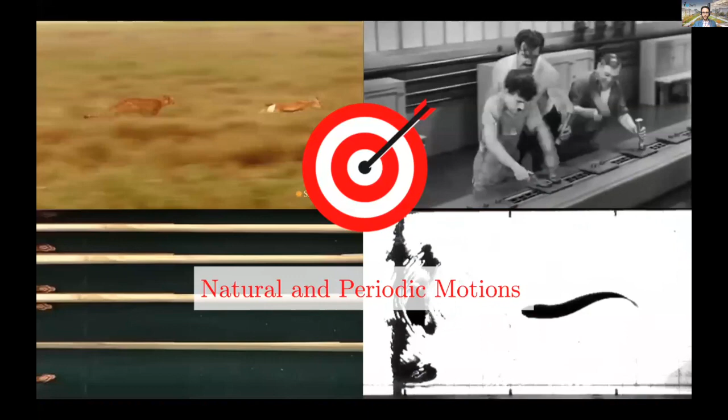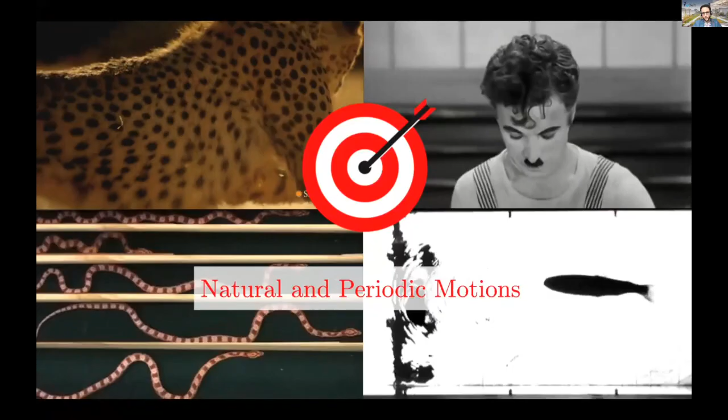The work I'm going to present, like many works we've seen at this conference, is inspired by nature, by the amazement we feel every time we look at the animal kingdom, and more specifically by the capability of humans and other animals to perform periodic motions in a very efficient and effective way.

As we know from decades of studies in biomechanics, these capabilities are strongly mediated by the presence of elastic elements together with inertia elements in the body of animals, like tendons and muscles.

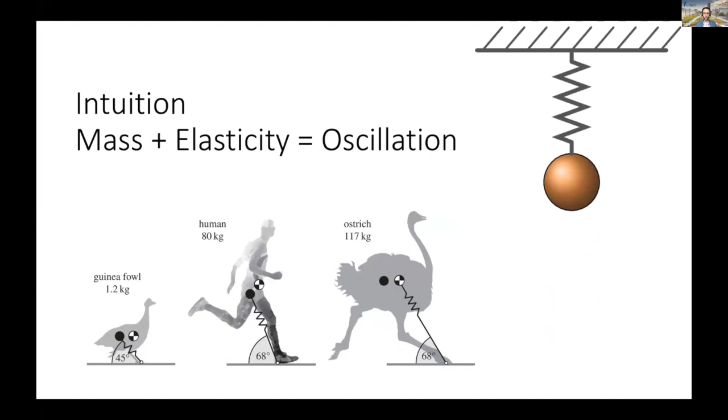This is clear intuitively if you think about linear modal analysis. For example, if you just put a mass together with a spring, what you get is open loop oscillations.

This was one of the big reasons why people started putting elastic and soft elements into the body of a robotic system, leading to what some nowadays call soft robotics. You can see a bunch of nice examples here.

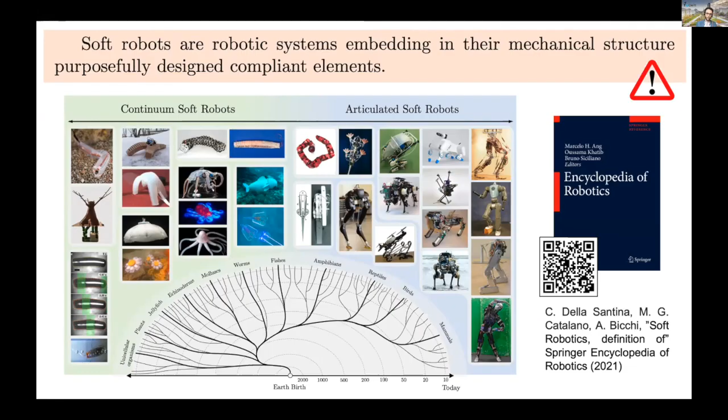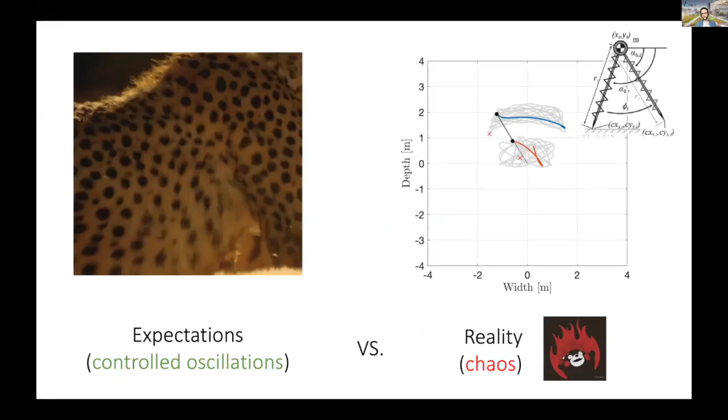However, while we have all these very cool structures, what happens if in simulation you try to take a very simple mechanical system with some elasticity, like the one on the right, is that the oscillatory behavior you find if you just initialize the system in some initial condition and leave it be is quite different from expectation—the controlled oscillations we observe in animals—and is instead more close to chaotic behavior.

The goal of this research is to look for the needle in the haystack—looking for regularity, open loop regularity, within this haystack of chaotic behavior that we find in mechanical systems.

We do that with a framework we call controlling eigenmanifolds, and let me try to convey the basic ideas of this framework in a few minutes.

What we do is divide the design into two steps. The first is about analyzing or understanding what the robot can do well—in terms of its mechanics, what it can do in terms of oscillatory behavior.

We do that by extending the very linear modal theory I used at the beginning of the talk as a kind of intuition. In a linear system, you have all these eigenspaces, one for each degree of freedom. An eigenspace can be seen as an infinite collection of periodic orbits, open loop, starting from the equilibrium and self-similar, with one for each energy level.

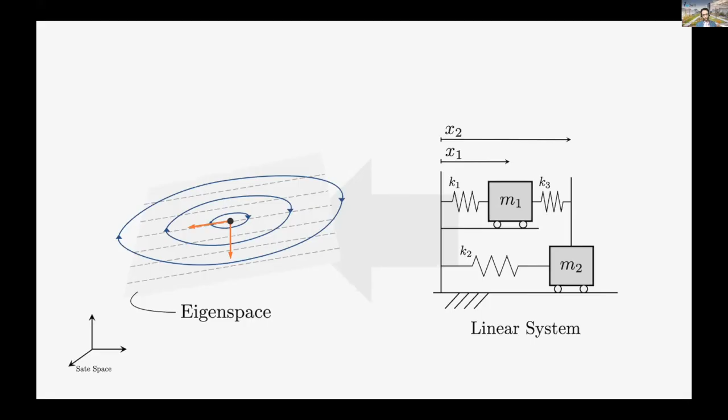When you move to a nonlinear system, or one with a non-Euclidean mass matrix driving it, the configuration state space gets curved, and as a consequence the eigenspace gets curved as well into a manifold—a 2D surface—but still maintains all the essential characteristics described before, such as being an infinite collection of self-similar oscillations, open loop, at different energy levels.

Instead of going into the nitty-gritty of the mathematical definitions of this object, it's probably more interesting to look at some examples to get a grip of what these eigenmanifolds represent.

This is one of the two eigenmanifolds of an double pendulum with some parallel elasticity. What you see here are three nonlinear modes, three slices of these eigenmanifolds for three different energy levels. What I want to stress is that these are, once again, completely open loop oscillations.

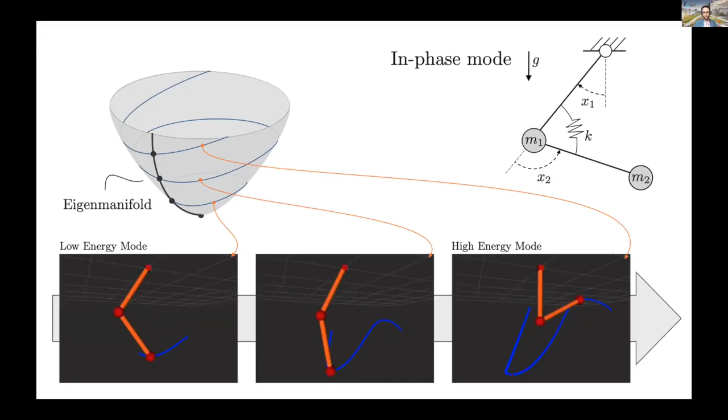You can also look at a more complex, high-dimensional mechanical system, like this KUKA robot where we add some parallel elasticity. What I'm showing here are all 7 eigenmanifolds of this robot, one for each degree of freedom, but I'm just showing a slice—one energy level, one joule.

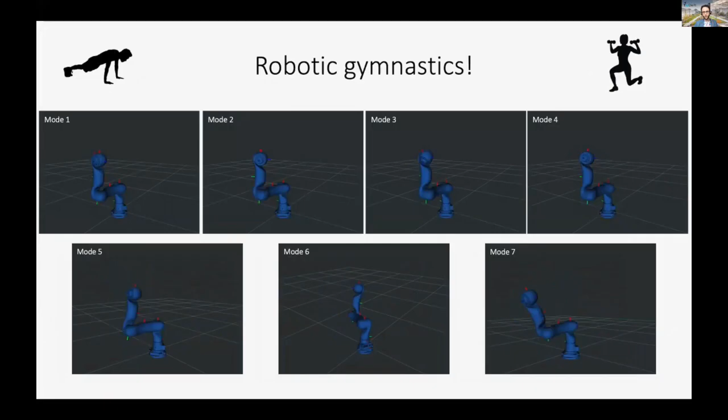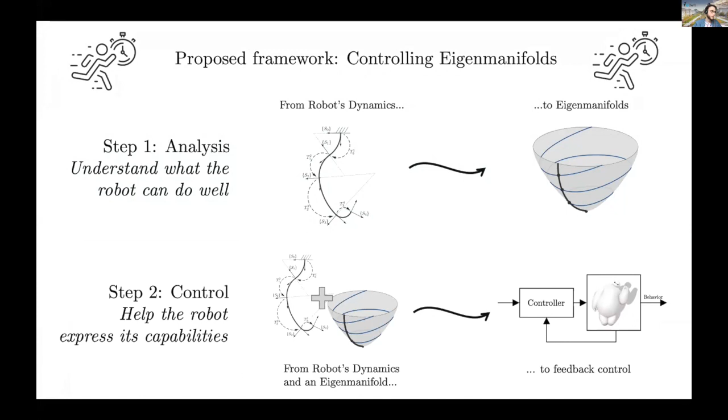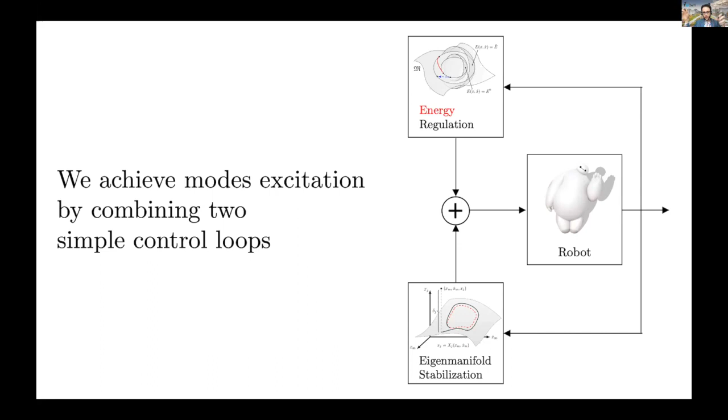Once we have a way to define what a robot is good at doing in terms of oscillatory behavior, the second step is to design controllers to sustain and excite these capabilities. We do that with two simple control loops: one stabilizes the eigenmanifold, making it an attractor by means of feedback control once you select the behavior you want to generate, and the other is an energy regulator that keeps the energy constant in the system and allows you to select the desired oscillation among the infinite ones in your eigenmanifold.

So this is the theoretical foundation of this theory in a nutshell. But as robotics is what we're particularly interested in, we want to understand if we can use these things to generate intelligent behaviors by exploiting the mechanics.

We've been looking in two directions, showing one example for each. One is industrial-like, repetitive motions, and what you see here are videos in which we are stabilizing and also switching between the very nonlinear oscillations I was showing before, on our elastic KUKA robot. You can imagine using them to perform tasks like painting or similar.

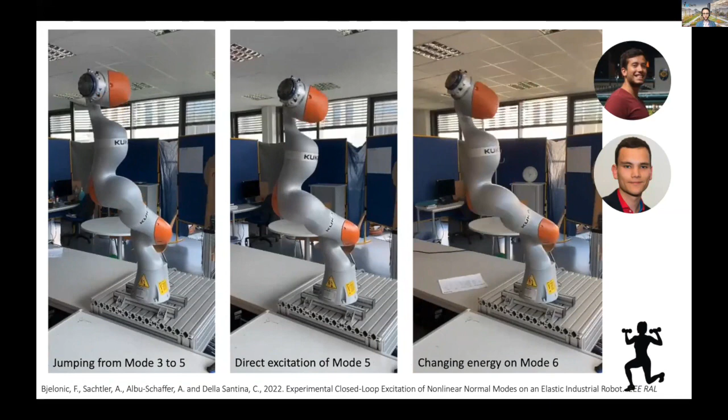The other one is, of course, locomotion. You've already seen quite cool talks about this topic today.

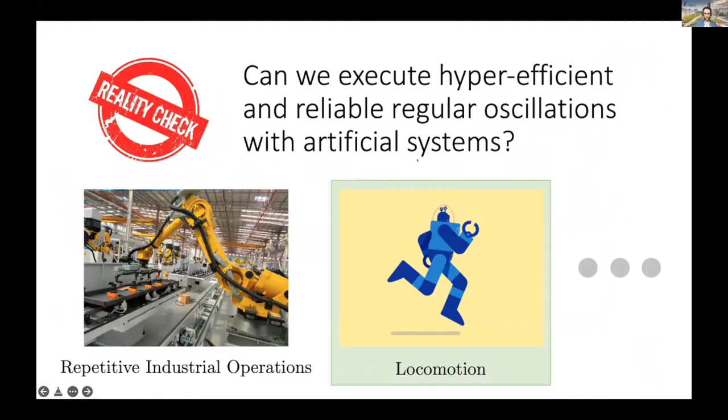Let me start... okay, it's not. Let me try to see if I can. Okay, it worked. So let me start with a simple example.

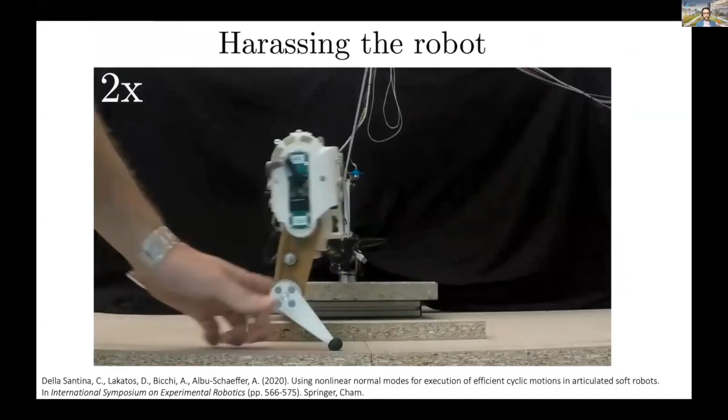We have this leg with lumped elasticity in the two joints, and again we use the same framework to excite these swinging motions that turn out to be an eigenmanifold of this leg. You can do that for different energy levels, and what's remarkable is that the closed loop behavior you get is remarkably robust to external perturbation.

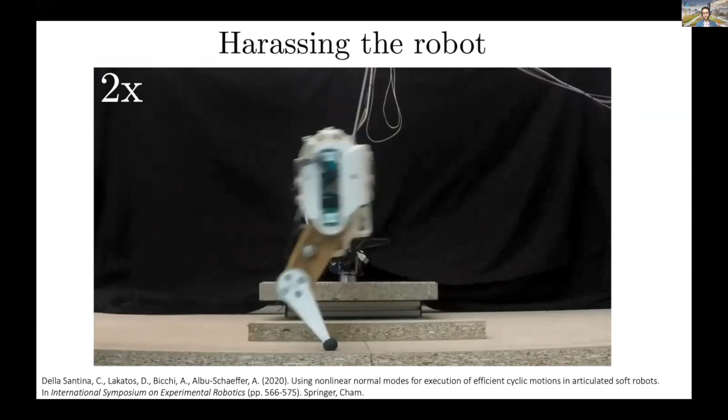The reason, at least in our interpretation, is that we are not, as in standard nonlinear control, forcing some prescribed behavior on the system, but quite the contrary—we are just helping the mechanical intelligence of the robot being expressed.

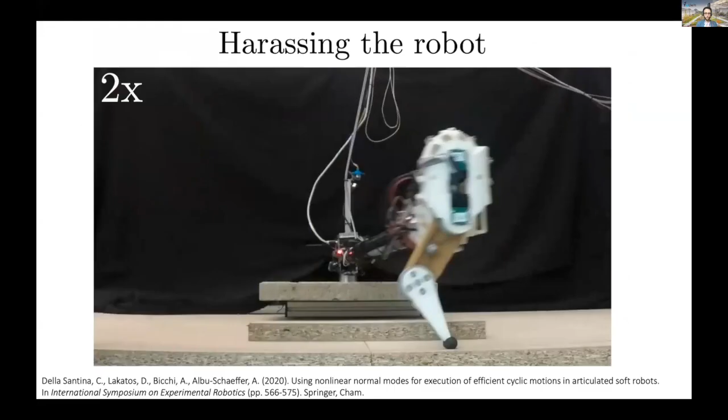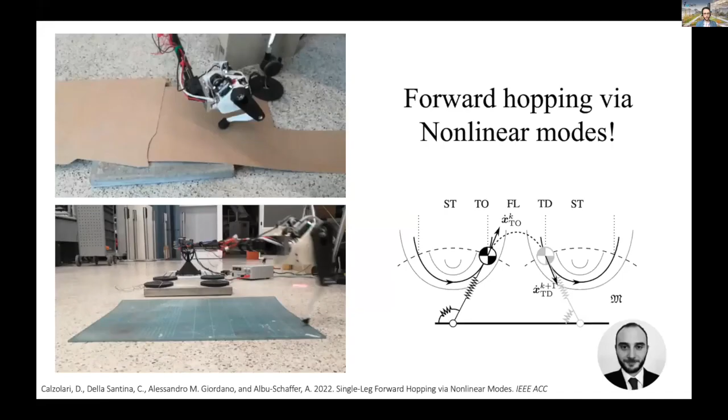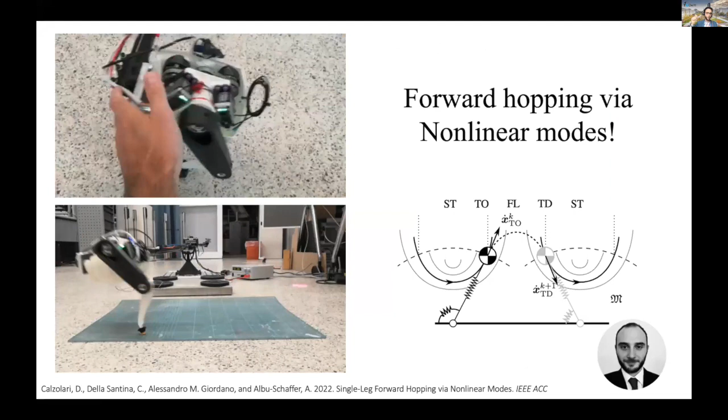Moving to actual locomotion, we were recently able to combine multiple of these eigenmanifolds in a fully hybrid setting to obtain modal forward hopping using nonlinear modes, and you can modulate the energy of these modes to get different velocities of locomotion. This is just a sneak peek of some current ongoing research on performing similar tasks but with a more complex soft robotic structure.

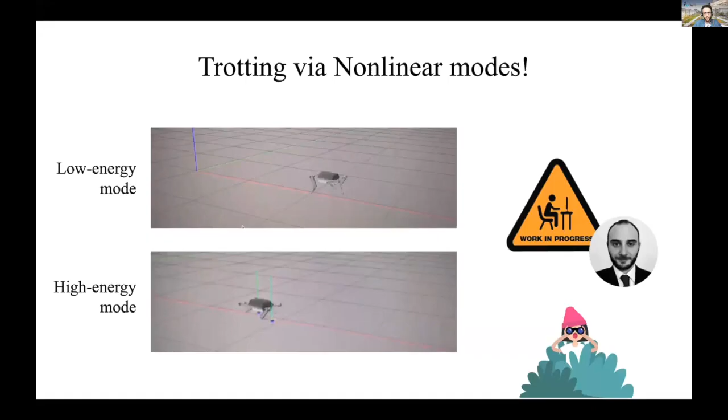To conclude, we are also working on a MATLAB toolbox to automatically extract all the eigenmanifolds of a mechanical system, expressed in your favorite way with differential equations or directly with CAD. We hope we'll be able to release it openly in a few months. That's all on my side—thank you very much for your attention, and I look forward to the panel discussion.

Okay, thank you, Cosimo. This is a really great overview of your work. Just a quick question: your mechanical dynamics is mostly about mass and elasticity—is there any other components you're thinking about?

In order to generate oscillation, yes, we are mostly focusing on that. What you see from the theory is that you need some way to store kinetic energy and some way to store potential energy. We focus on springs, which are maybe just easy to implement, but you can think of any way of storing potential energy, like magnetic fields or other things, and in principle you should be able to obtain similar results.

Excellent, yeah, thank you. This was a really great introduction of your latest work. So let's talk about it in a few minutes.